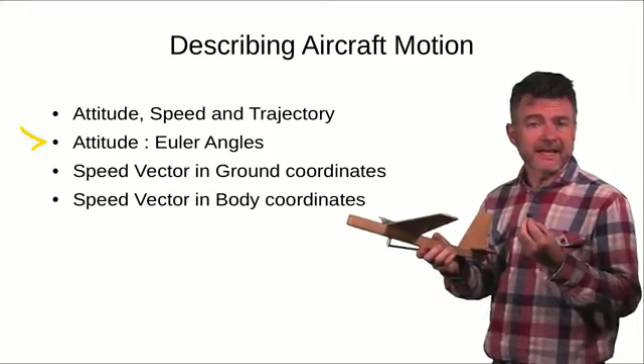Describing airplane motion is the basis of flight mechanics. And for that, we need a precise vocabulary to describe, first, the attitude of the body, in which direction the nose and the right wing are pointing to. For that, we will use Euler angles. And second, we want to describe the speed vector in ground coordinates. It is where the airplane is going to.

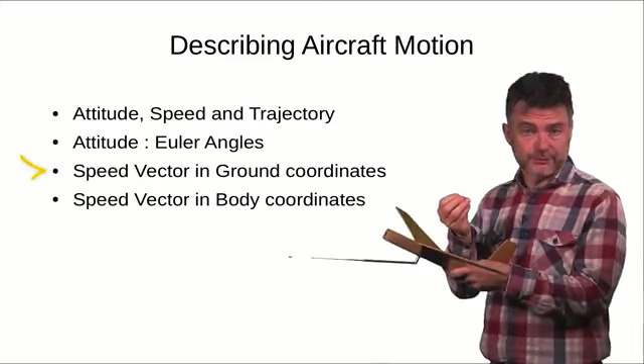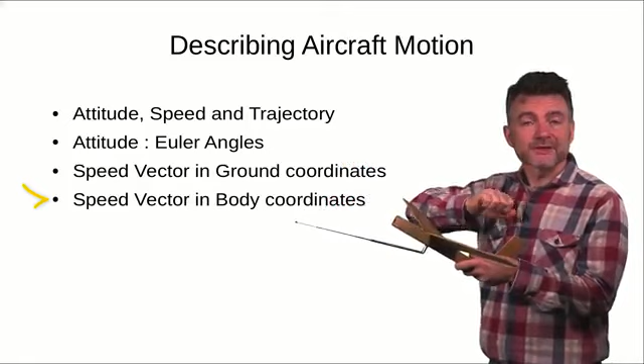And finally, we also want to describe the speed vector direction in body coordinates. It is from which direction the airflow is impacting the wing. This will be important to determine aerodynamic forces. In this course, we will consider that there is no wind and that the speed relative to the air is the same as the speed relative to the ground.

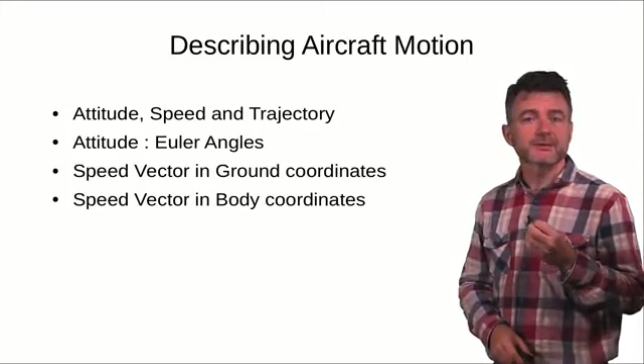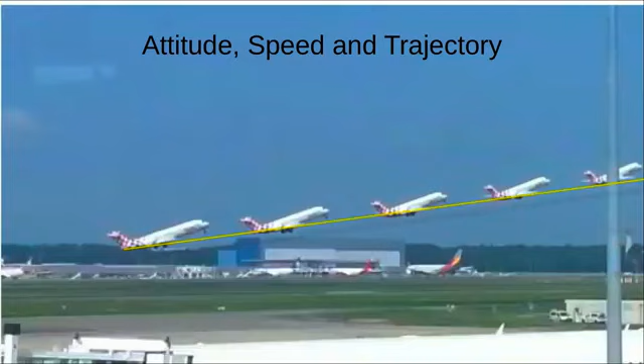So let's consider this aircraft I captured with my phone taking off from Toulouse Airport. We can see that its trajectory is almost linear with a slight upward curvature. At any point, the speed vector is tangent to the trajectory. The speed vector is building the trajectory, and that's why the pilot wants to control the speed vector in order

to control this trajectory. But as we can see, the longitudinal axis of the airplane, the dotted black line, is far from being parallel to the speed vector. In other words, the aircraft doesn't go where its nose is pointing to. To define the aircraft attitude, we will use Euler angles.

So starting with body and wing level, the nose supposedly pointing to the north, I perform a first rotation about a vertical axis. This angle of rotation is called the heading and noted with the Greek letter psi. Then I will turn around the right wing axis and then around the body axis.

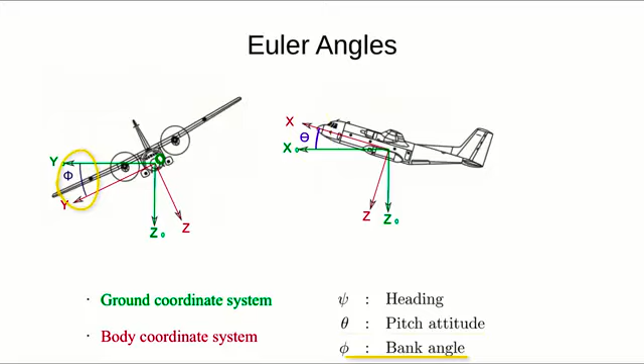Those two angles of rotations are called the pitch attitude, theta, which is positive when the nose is raised up, and the bank angle, phi, which is positive when the right wing is down. I will now define the direction of the speed vector relative to the ground.

In the same way, but with only here two rotations, because I need only two rotations to define the direction of a speed vector. Okay? So I start with the speed vector pointing to the north. Then I will perform a first rotation about a vertical axis, and then a second one around a horizontal axis.

The first one will define the track of the airplane, and we won't use it too much, as the aircraft is flying exactly the same way when it flies to the north or when it flies to the east. The second one is very important. It is called the flight path angle, gamma. I may say FPA in short. It is far more important, and it indicates whether the airplane is climbing or descending and to which extent.

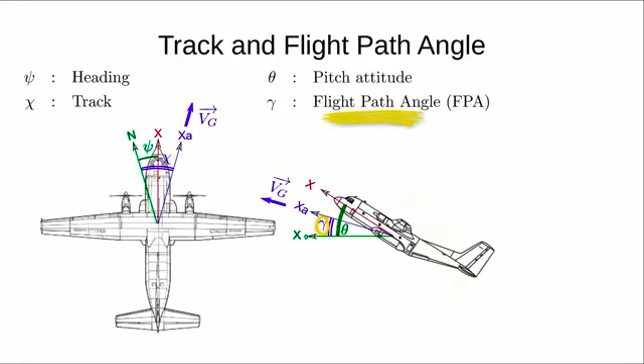We can also define the direction of the same speed vector, but now this direction is relative to the aircraft body. This will be particularly useful to determine aerodynamic forces. First, we define beta, the side slip, which is the angle between the speed vector and the airplane plane of symmetry. In normal flight, it should be null.

And second, we will define alpha, the angle of attack, which is the angle between the speed vector projection on the plane of symmetry and the body axis x. This one is a very important parameter. In the very particular case where bank angle is null, and only in this case, we have this interesting relationship: theta equals gamma plus alpha.

Be very careful, this is no longer true in a turn, for example, as those angles are no longer defined in the same plane. So coming back on the takeoff, we can visualize the flight path angle, which is the angle between the blue speed and the green horizontal line. Then we can define the angle of attack between the speed vector and the dotted black body axis. And finally, the pitch attitude between the green horizontal and the body axis.